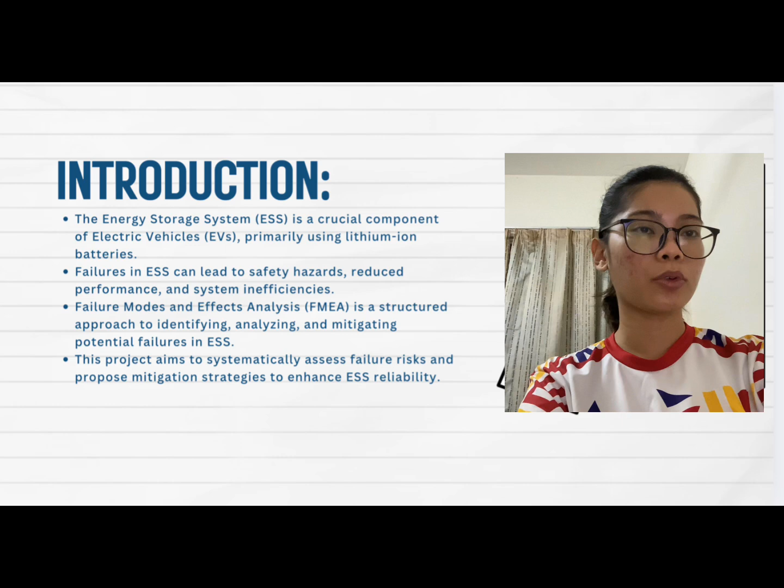Despite technological advancement, ESS failures remain a major challenge. Issues like overheating, electrical faults, and software malfunctions can lead to serious safety hazards and financial losses. Without proactive failure analysis, these risks may go undetected until critical failures occur, making FMEA essential for improving ESS reliability.

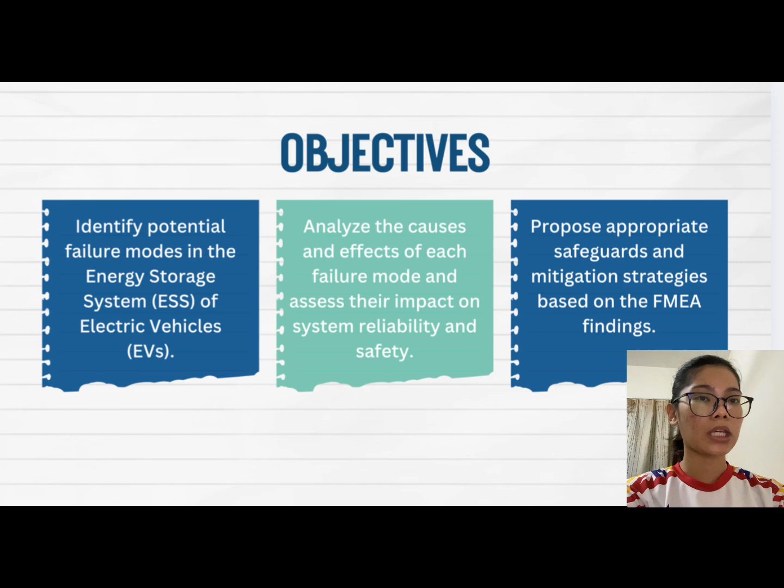Our project focuses on three main objectives: identifying potential failure modes in the ESS of EVs, analyzing their causes and effects on system reliability and safety, and proposing effective safeguards and mitigation strategies based on our FMEA findings.

Assalamualaikum. Today I'll be discussing FMEA on the EV energy storage system, the key process that ensures safety and reliability in electric vehicles. FMEA, or failure modes and effects analysis, is a structured method to identify potential failure modes, analyze their effects, and develop strategies to reduce their impact. The ultimate goal is to make EV systems more reliable by taking preventive steps early.

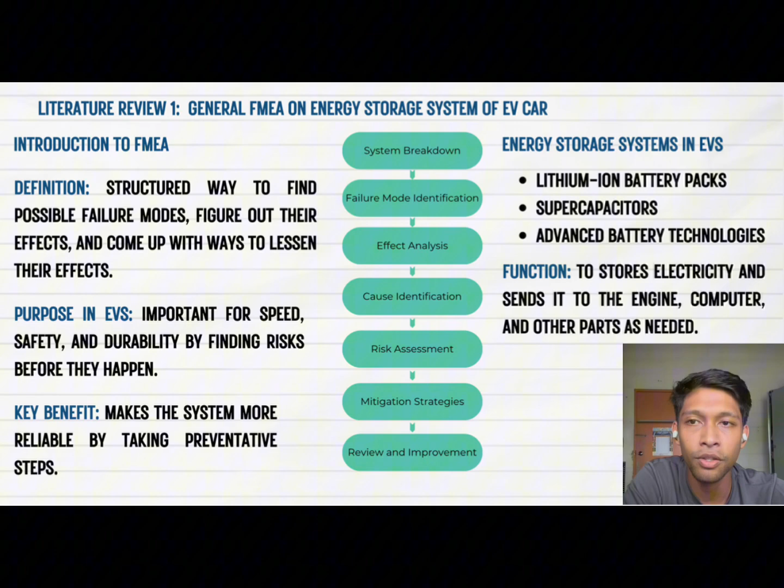So these are common energy storage options in EVs: lithium-ion battery pack, supercapacitor, advanced battery technologies. This system stores electricity and distributes it to the engine, computer, and other EV parts as needed.

So the key components of the EV energy storage system: the battery pack contains modules of cells for energy storage, BMS to track battery health, thermal management system to ensure the battery operates at a safe temperature, and electrical connection protection devices to manage electrical flow and prevent overcurrent.

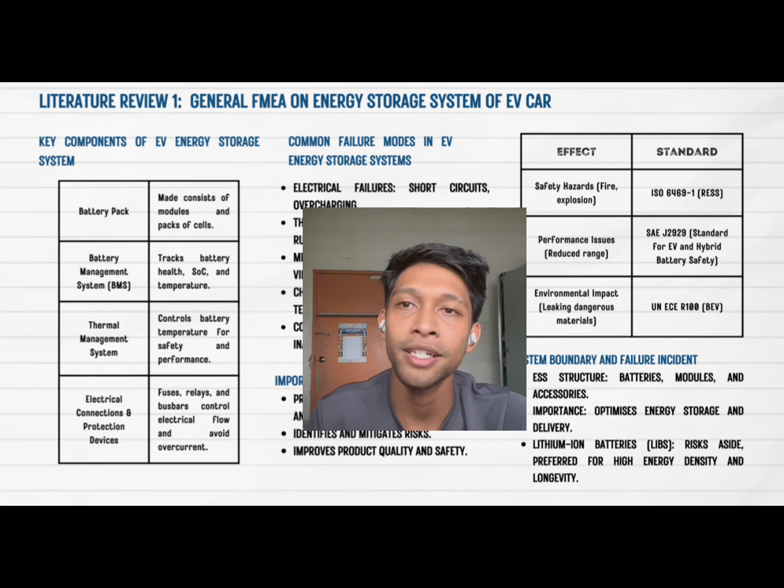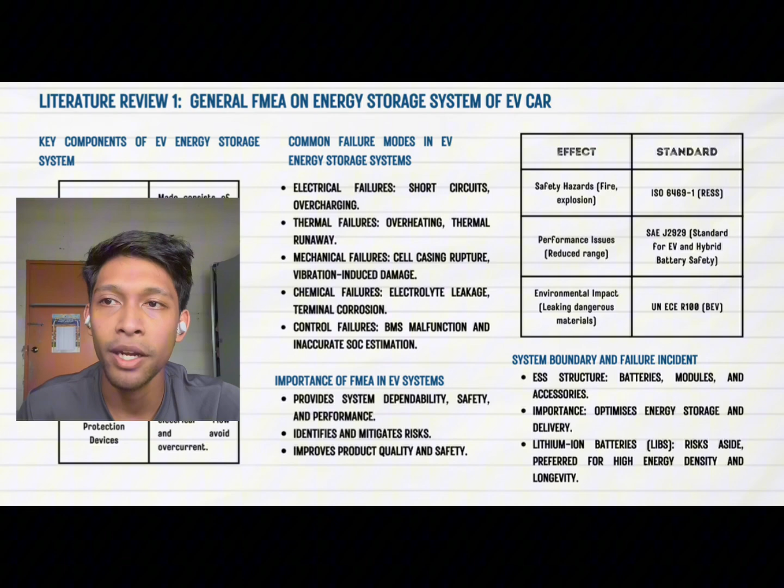There are some common failure modes in EVs, which are overcharging, overheating, vibration damage, terminal corrosion, and BMS malfunction. FMEA is important because it enhances dependability, safety, and performance, identifies and mitigates risks, and improves overall product quality and safety. Moving on to system boundary and failure incidents related to energy storage systems.

Failure in energy storage systems occurs due to a combination of thermal, mechanical, and electrical stress. Excessive heat, physical damage, and electrical faults can compromise battery integrity, leading to hazardous failure. Additionally, material limitations such as the lower thermal stability of nickel-rich chemistry increase battery vulnerability. Manufacturing defects, including poor assembly and contamination, further contribute to failure risks.

One of the most critical failure mechanisms in energy storage systems is thermal runaway, where excessive heat triggers uncontrollable chemical reactions within the battery. This can escalate to thermal propagation, where heat spreads to nearby cells, leading to larger scale failures. Electrochemical reactions such as lithium plating and electrolyte decomposition further degrade battery performance. If vent gases are not managed properly, toxic emissions can cause safety and environmental hazards.

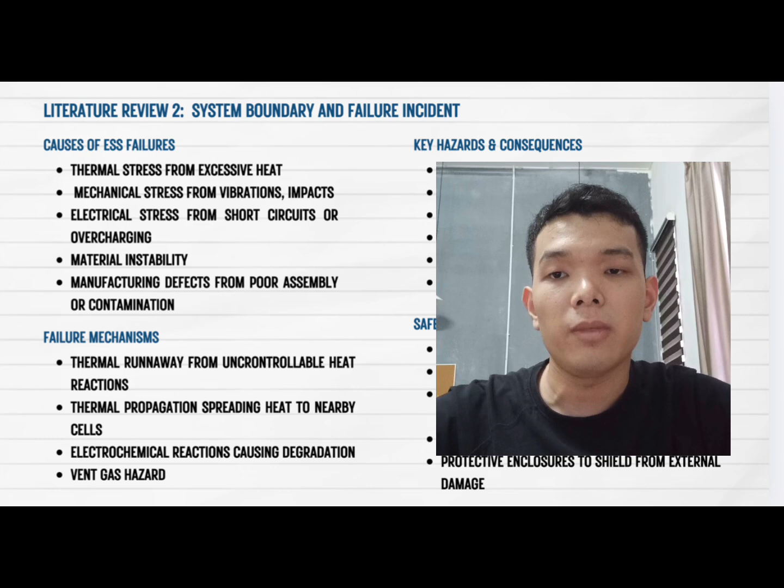Energy storage system failure can cause fires, explosions, and system malfunction, posing risks to both users and infrastructure. For electric vehicles, energy storage system failure may result in sudden power loss, affecting performance and user safety. Additionally, hazardous material leaks can contaminate air, soil, and water, leading to long-term environmental damage. On top of that, failure leads to higher maintenance costs and reduced system reliability.

To prevent energy storage system failure, multiple safety measures must be implemented. Battery management systems, BMS, play a crucial role in monitoring temperature, voltage, and current to detect early signs of failure. Efficient cooling and ventilation systems help regulate temperature and prevent thermal runaway. Smart protective mechanisms such as circuit breakers and automatic shutdown features further enhance system safety.

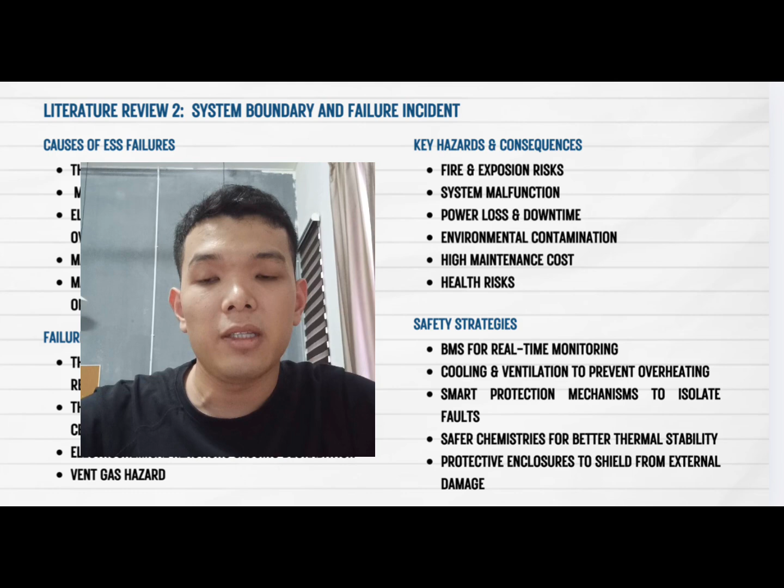Additionally, alternative battery chemistries like lithium iron phosphate and solid-state batteries offer improved stability and lower safety risks compared to traditional lithium-ion batteries. Energy storage systems in electric vehicles play a crucial role in vehicle performance, efficiency, and safety. To ensure their reliability, several inspection methods are used throughout their life cycle.

There are 7 methods that I will talk about, which are visual inspection, electrical testing, thermal inspection, non-destructive testing (NDT), fault diagnosis, BMS diagnostics, as well as the comprehensive approach. Now let's look into each of these testing methods. First up, visual inspection is the most basic yet essential step, which helps to identify visible damage such as cracks, corrosion, or leaks that compromise safety.

Next up, electrical testing ensures the system operates correctly by checking the voltage, current, insulation resistance, as well as the battery capacity. Another key method is thermal inspection, which uses infrared thermography to detect overheating, poor connections, or cooling system failures. Additionally, NDT, or non-destructive testing, uses ultrasonic and X-ray images, which allows for internal inspection without causing any damage. Finally, BMS diagnostics leverage real-time data monitoring to detect faults early, enabling predictive maintenance and reducing unexpected failures.

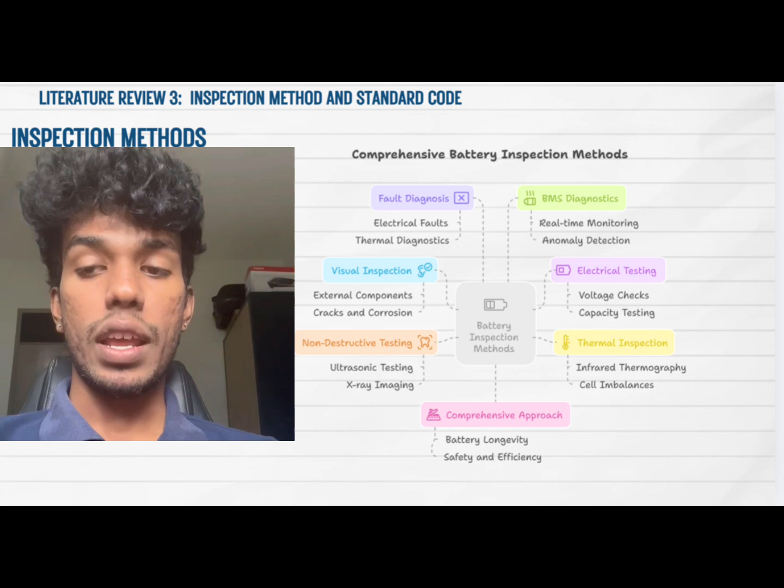Regular inspection of the EV energy storage system is essential to prevent failures, and this helps to ensure user safety as well as extending battery lifespan and minimizing risk. As we know, electrical storage systems are crucial in electric vehicle design. Therefore, to ensure reliability, various international standards guiding testing and safety procedures are implemented by organizations such as SAE, ISO, UL, as well as IEC. Now, let's look into a few of the international standard procedures implemented by these organizations.

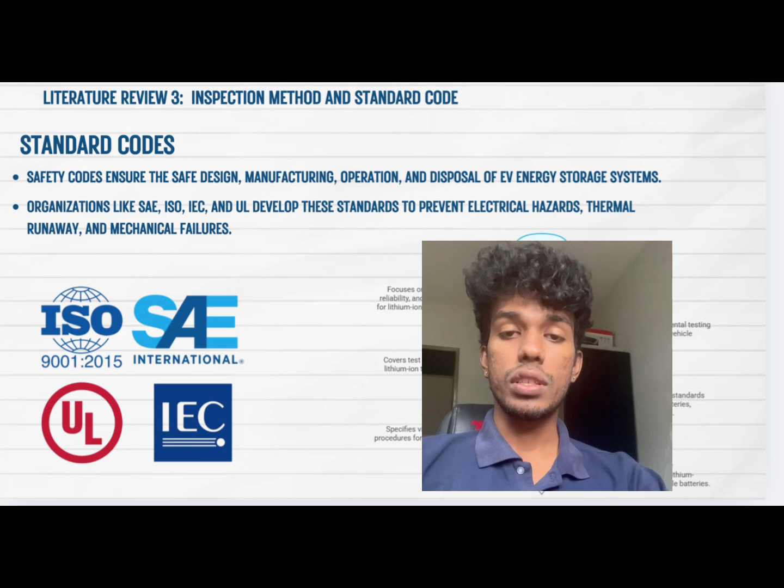First up is ISO 12405, which defines performance and reliability tests for EV battery packs, ensuring they function safely under different conditions. Next, there is ISO 16750, which focuses on the environmental stresses batteries and electronic components face, such as vibration, temperature, and electrical loads. IEC 62660 sets the testing framework for individual battery cells, ensuring they meet electrical, mechanical, and reliability requirements.

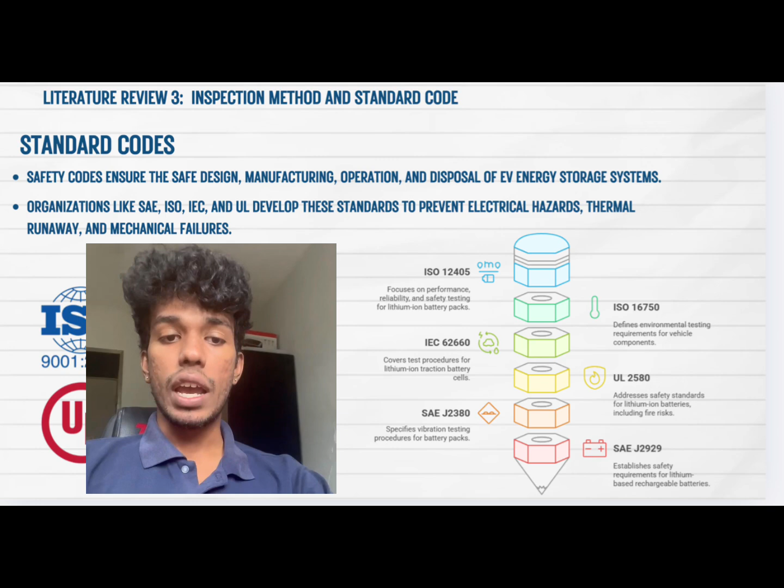UL 2580 ensures safety compliance, covering risks like fire, explosion, and electrical failures in EV batteries. Lastly, SAE J2380 specifically tests battery vibration resistance, simulating real-world driving conditions. All these standards guarantee that EV batteries are efficient, durable, and most importantly, safe for consumers.

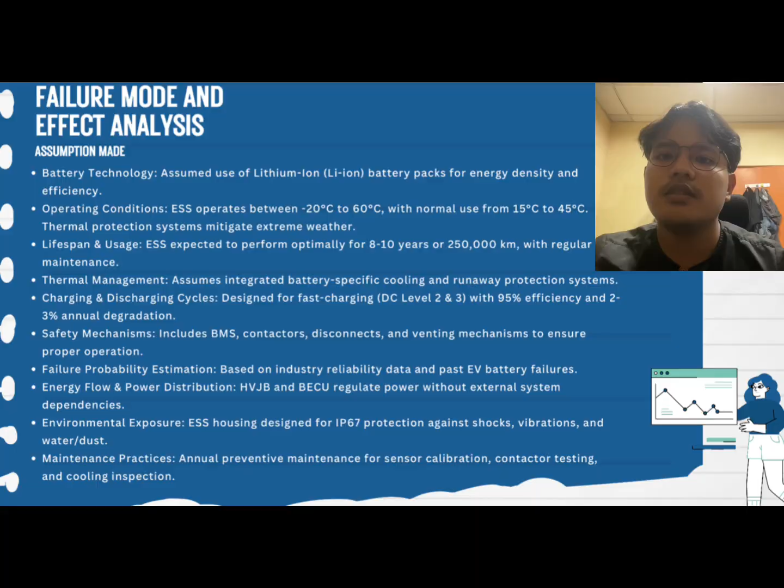Five, the safety mechanisms include the battery management system, contactors, and venting system to prevent failures. Six, preventive maintenance includes annual sensor calibration and cooling inspection. So now let's look at the FMEA table for the ESS components. First, the battery packs, which are cells and modules. The failure mode is cell overheating with RPN 150. It will cause thermal runaway, and to prevent this, we improve cooling and add thermal sensors.

For the battery management system controller, the failure mode is sensor malfunction with RPN of 112. The effect is incorrect SOC estimation, and to prevent this, we need to add redundant sensors and regular calibration. Third, the battery contactors and safety disconnect. The failure mode is welded contactor with RPN 81, and the effect is preventing safe disconnection during faults. To prevent this, we need to upgrade the contactors and introduce smart shutdown.

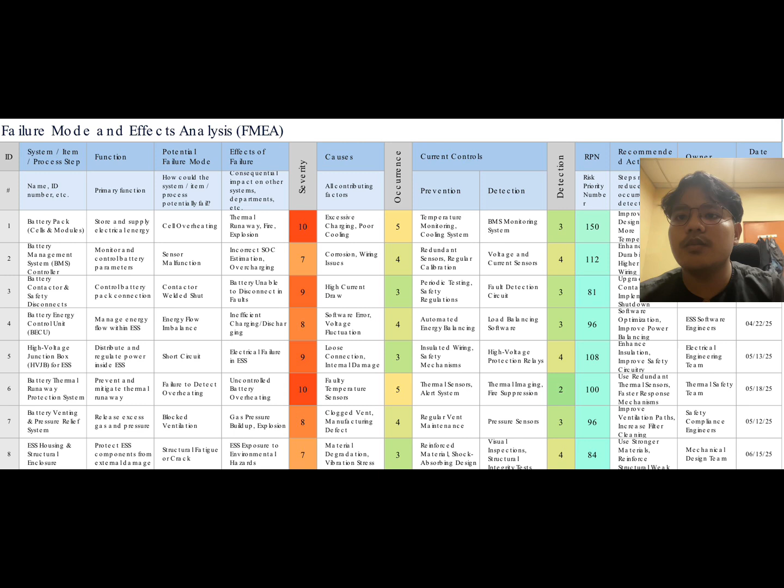Fourth, the battery energy control unit (BECU). The failure mode is energy flow imbalance with RPN of 96. The effect is inefficient charging or discharging. The action to be taken is to improve power balancing and optimize software. Fifth, the high voltage junction box (HVJB): the failure mode is short circuit with RPN of 108. The effect is electrical failure and potential hazard. The action to be taken is to enhance insulation and add safety relays.

Six, the battery thermal runaway protection system. The failure mode is failure to detect overheating with RPN of 100. The effect is uncontrolled battery overheating, and to prevent this, we need to add redundant thermal sensors and improve response time. Seven, the battery venting and pressure relief system. The failure mode is blocked ventilation with RPN of 96, and the effect is pressure buildup and explosion risk. The action to be taken is to improve the ventilation and increase filter cleaning frequency.

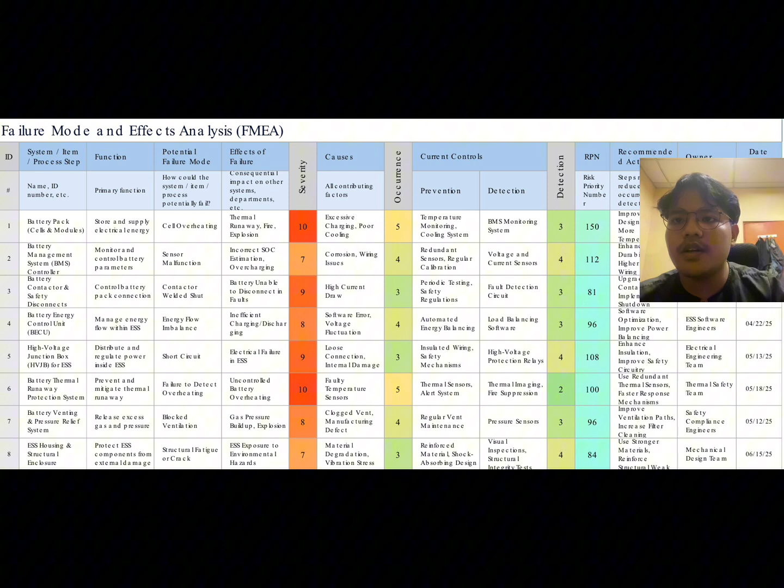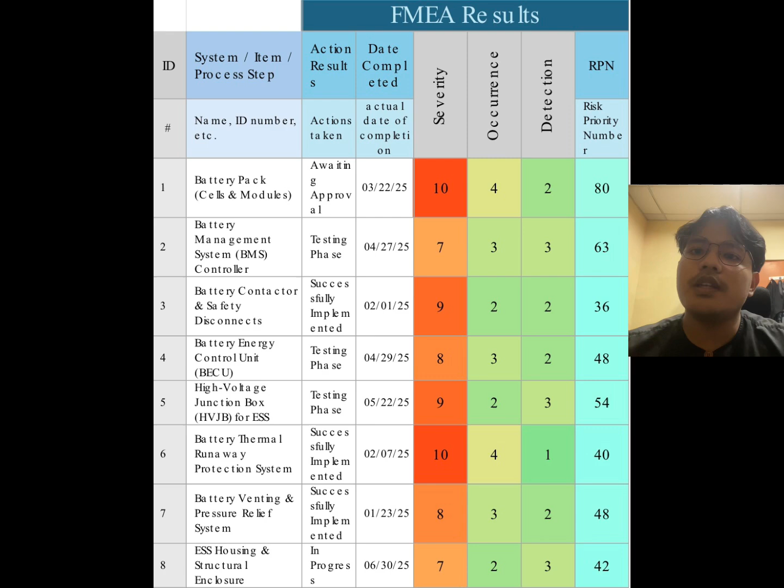Lastly, the energy storage system housing and structural enclosure. The failure mode is structural cracks with RPN 84. The effect is exposure to environmental hazards, and the action to be taken is to reinforce material and improve structural design. So, in summary, the highest priority failure mode is cell overheating with RPN 150, and we have already begun implementing solutions such as cooling system improvement and thermal sensor upgrades.

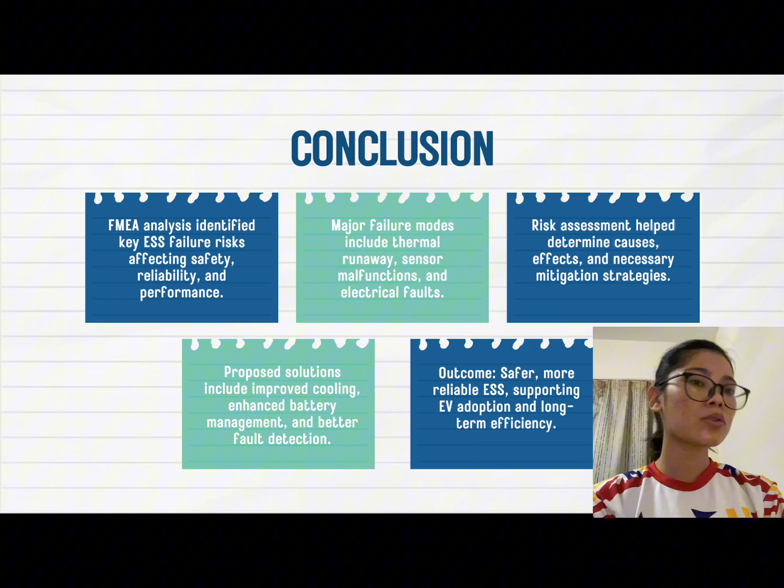In conclusion, our FMEA analysis identified key failure risks in EV ESS such as thermal runaway and electrical faults. We propose solutions like enhanced cooling, battery management, and advanced fault detection systems to improve reliability and safety. By addressing these risks, we contribute to the development of safer, more efficient energy storage solutions for EVs.